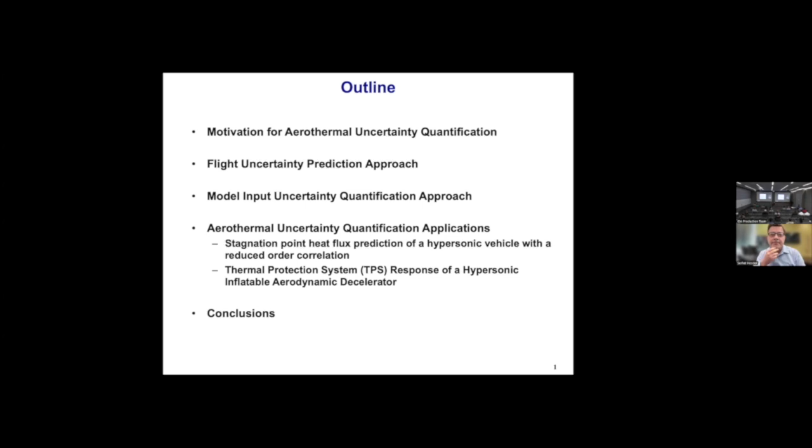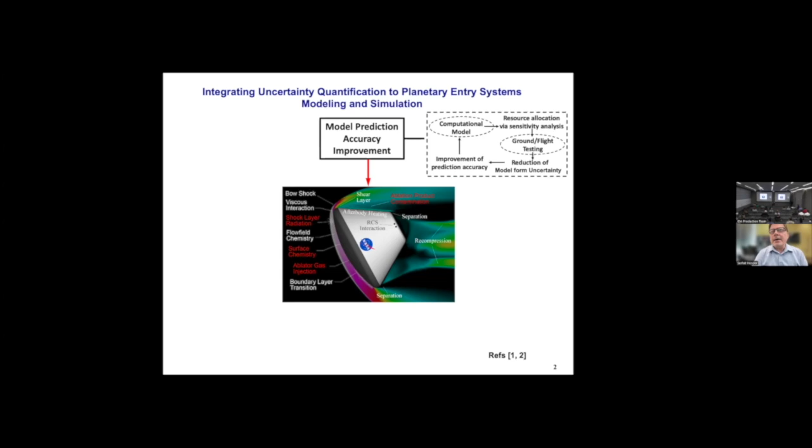And in addition to the inherent uncertainties related to the environment, we also have significant uncertainties in the physical models. So we have a number of reasons to include uncertainty quantification in modeling and simulation. One obvious reason is to improve the prediction accuracy of our models. By using uncertainty quantification, and a byproduct of uncertainty quantification is sensitivity analysis, we can identify significant uncertainty sources in our model. And then we try to plan our ground and flight testing to reduce these errors. In turn, we try to improve our prediction accuracy.

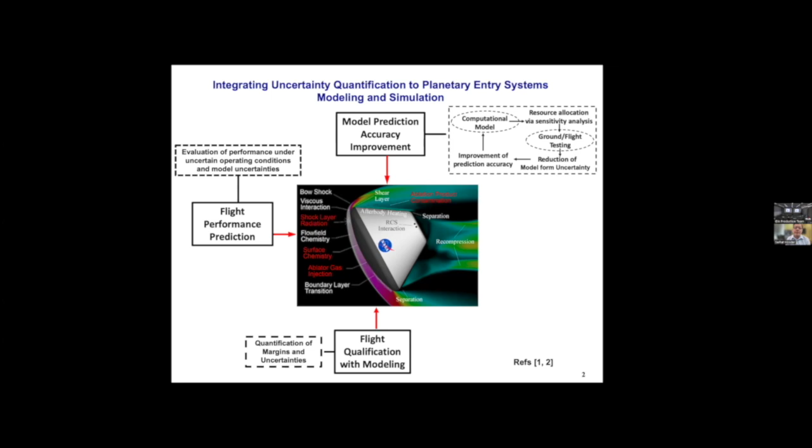The other motivation to include uncertainty quantification is to evaluate the flight performance under uncertain operating conditions and model uncertainties. We can also utilize modeling with uncertainty quantification in the flight qualification of entry systems. We can calculate the uncertainties and the margins, and then using the quantification of margins and uncertainties methodology, we can try to certify our systems. And finally, we can integrate uncertainty quantification into the design of the vehicle to increase the robustness and the survivability. With this, we are reducing the impact of the uncertainties on the vehicle performance and the reliability.

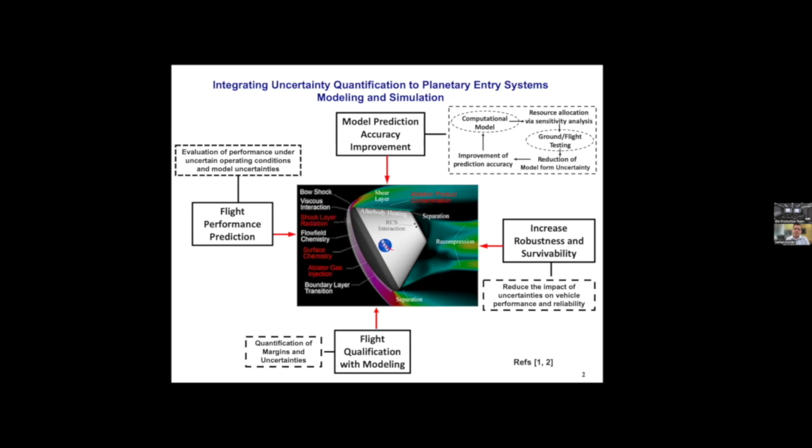So here, I would like to give a brief description of our approach for flight uncertainty prediction with the computational models that we use. Here you see the computational model. It's a CFD model. We simulate the hypersonic environment of a hypersonic inflatable aerodynamic decelerator. I included it as an example. And then in our approach, we also utilize available ground test data and also the flight test data, because our objective is to get the total uncertainty in the predictions to be able to predict the uncertainties in the actual flight. So I'm going to start with the uncertainties associated with the computational model.

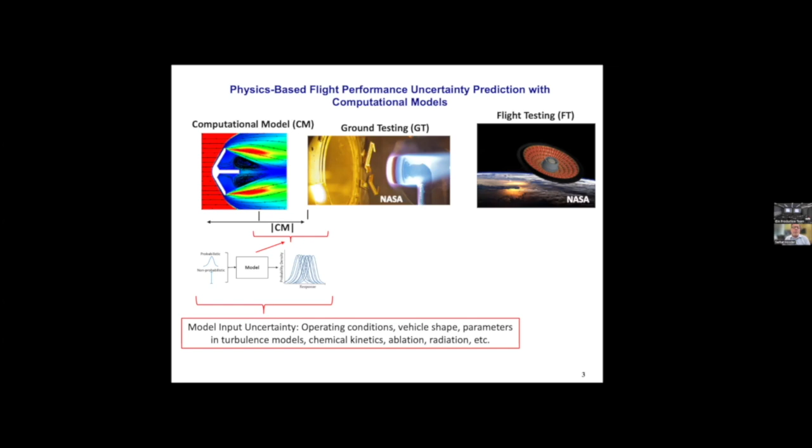We have what we call model input uncertainties, which could be, as you see, probabilistic, or they can be non-probabilistic, epistemic uncertain variables. Any uncertainty for which we don't have enough data, we can also treat as epistemic. And in our approach, for non-probabilistic or epistemic uncertainties, we typically use an interval approach. So we have a mixed uncertainty set, and we propagate this through our model, and that's what I'm going to be focusing on for the rest of this talk. And then this gives us the model input uncertainty for our response quantity of interest, which could be surface pressure, shear, heat flux, or the recession rate due to ablation.

And just to give you some idea, these uncertainties may include sources coming from operating conditions, the uncertainty in the vehicle shape change, the modeling parameters in chemical kinetics, turbulence models, ablation, and radiation. Since we are solving our problem numerically, we also need to include the uncertainty coming from the numerics, such as the discretization error or iterative convergence error.

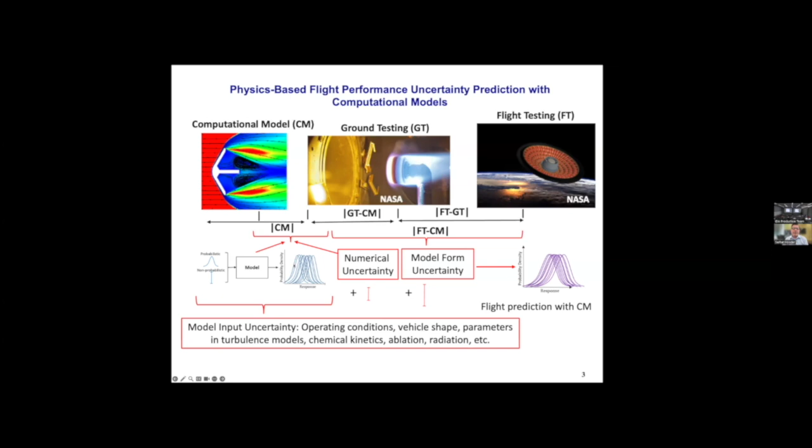And then we have to compare the model input uncertainty appended with the numerical uncertainty to the actual reality. We will be comparing our results to the experimental data or the flight test data. The way we compare our simulations to this experimental data is done through a validation metric, which gives us the model form uncertainty. So overall, when we add all these uncertainties, we have the total flight prediction uncertainty with our computational model. So next, I am going to be focusing on the model input uncertainty quantification.

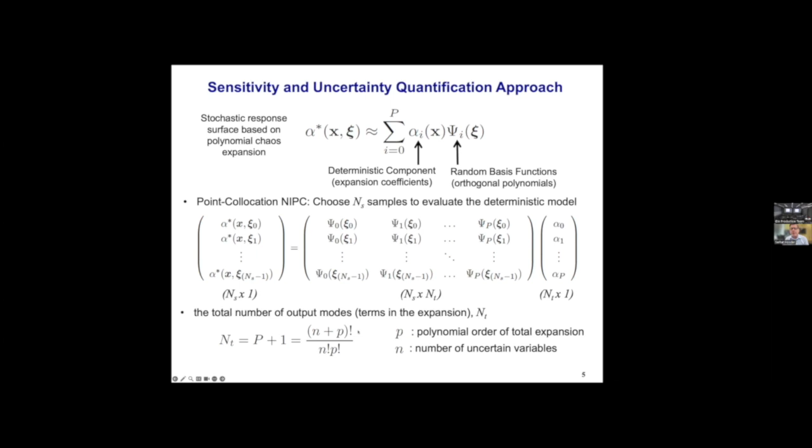Now, there are different ways of obtaining these coefficients, which are the unknowns in our expansion. For our hypersonic entry problems, we've been mostly using this point collocation NIPC approach, where we produce a number of samples and evaluate this model at those sample locations, which gives us this linear set. And this is the number of samples we use. Here, NT is the total number of output modes, which is going to be a function of the number of uncertain variables and the polynomial order of the total expansion.

Now, depending on the number of samples, we can have different approaches to solve this linear set. When our number of samples is equal to NT, we have the required number to obtain a solution with the determined system. We can always take more samples than required, and then we have an overdetermined system. We can define an oversampling ratio, and we had problems where we used an oversampling ratio of 2, which worked fine. In this case, we obtain our solution through a least squares approach.

But for these two cases, even though we use a polynomial chaos approach, when we have a large number of uncertain variables, again, the required number of simulations can be very high. So in order to address this problem, we've been taking fewer samples than the minimum required, which gives us an underdetermined system for that linear set. And this is actually the basis of our sparse sampling approach. It is going to be the most efficient approach in terms of the computational cost.

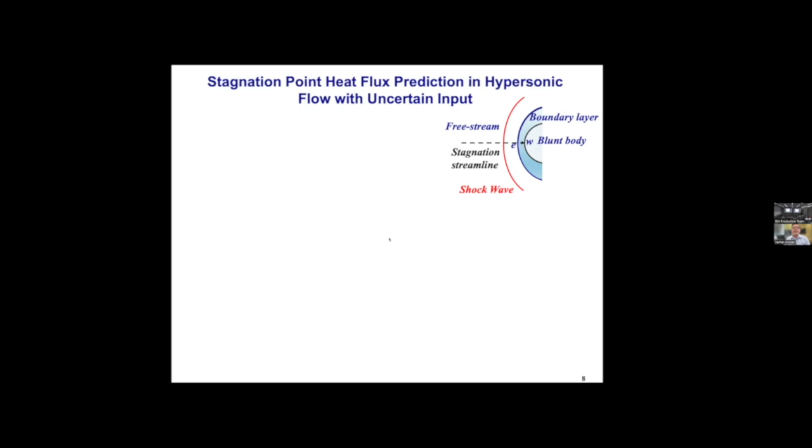Now, I'm going to present our first application problem. This is a model problem, a validation problem to predict the stagnation point heat flux on a blunt entry body. And this is a correlation, so it is cheap to evaluate, and we can do Monte Carlo with this model so that we can compare our approach to the Monte Carlo results. Of course, I'm not going to go in detail over this. This is our mathematical model.

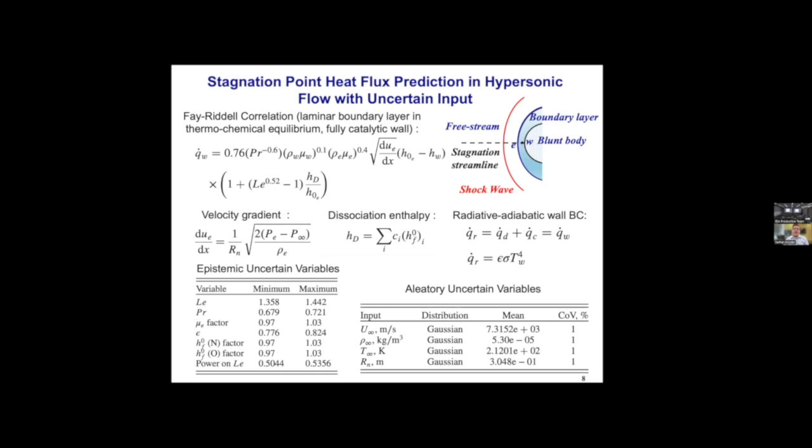So for this case, we considered 11 uncertain variables. 7 of them are epistemic uncertain variables, as you see, and then we have 4 aleatory or inherent uncertain variables. And then with 11 uncertain variables, if you use a second degree polynomial expansion, then the minimum number required is going to be 78.

We solved this problem with the sparse sampling approach using different samples, increasing it iteratively. And then we compared our results to a Monte Carlo simulation with 400,000 samples, and then an NIPC expansion with an oversampling ratio of 2, which required 156 samples.

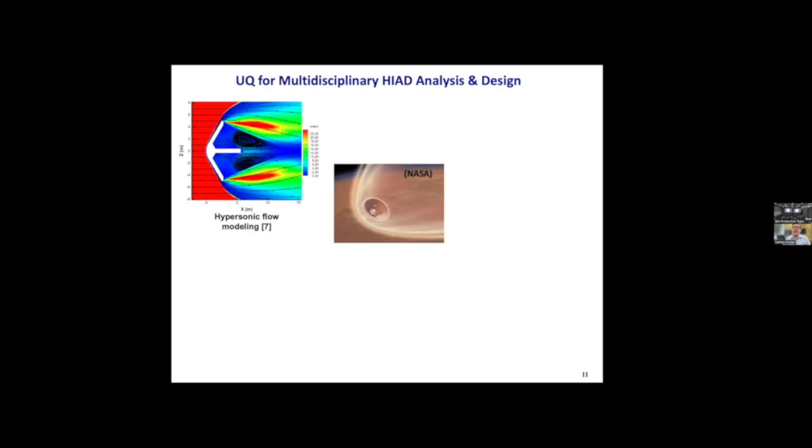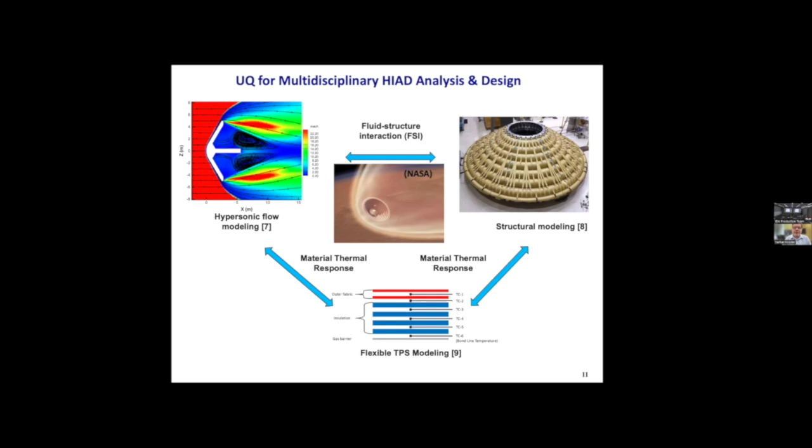So we worked on this as part of a NASA project, and it's a multidisciplinary problem. Therefore, even though our eventual goal is to predict the uncertainty in the thermal response of the flexible TPS, we need to still consider the uncertainties in the hypersonic flow field modeling because it affects the thermal response. And also we had to consider the uncertainty coming from the structural modeling. And I use those in the prediction of the uncertainty in the flexible TPS modeling, which I will describe next.

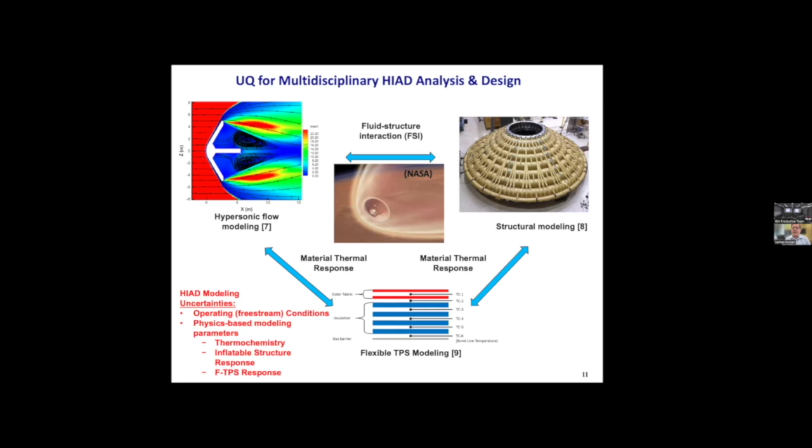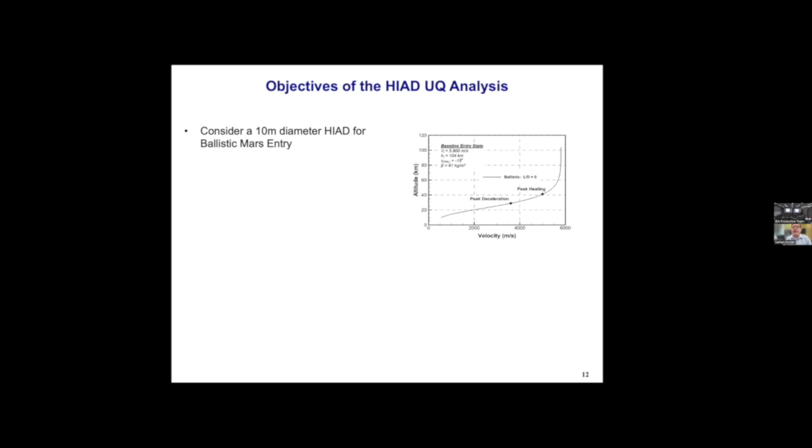And we consider uncertainties in the operating conditions and also various uncertainties in the physical models related to the flow field, the TPS, and the structural modeling. So for this problem, we are considering a 10-meter diameter HIAD for a nominal ballistic Mars entry. And then first, we would like to identify significant uncertainty sources in the flow field, which affects the aerodynamic heating, shear, and pressure, and then use them in the uncertainty quantification of the flexible thermal protection system response.

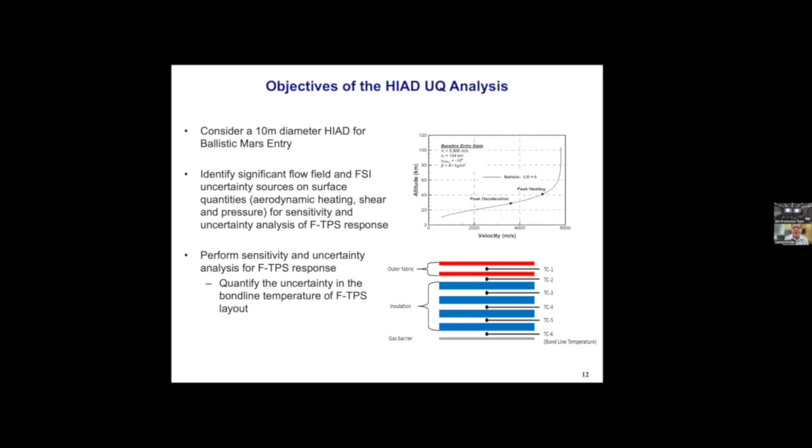And here you see a simplified layout of the flexible TPS. It is made up of different layers. You have the outer fabric layer; it's a silicon carbide-based fabric. Then you have some insulation layers. And then you have this final layer between the gas barrier at the TC6 location. And that is the location that we are interested in, quantifying the uncertainty on the temperature at that location, which is the bondline temperature.

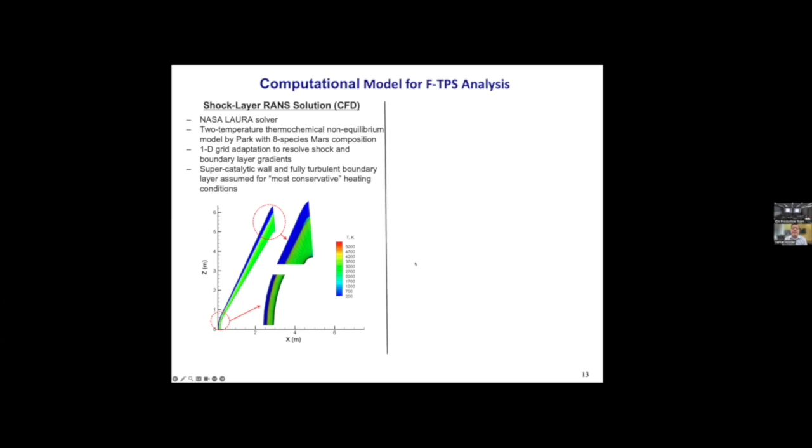So here, quickly, we are using a high-fidelity CFD code from NASA Langley, LAURA, modeling the flow field. And then also we have a thermal response model coupled to the CFD solution. And these simulations are also expensive. That's why we are using the sparse sampling approach.

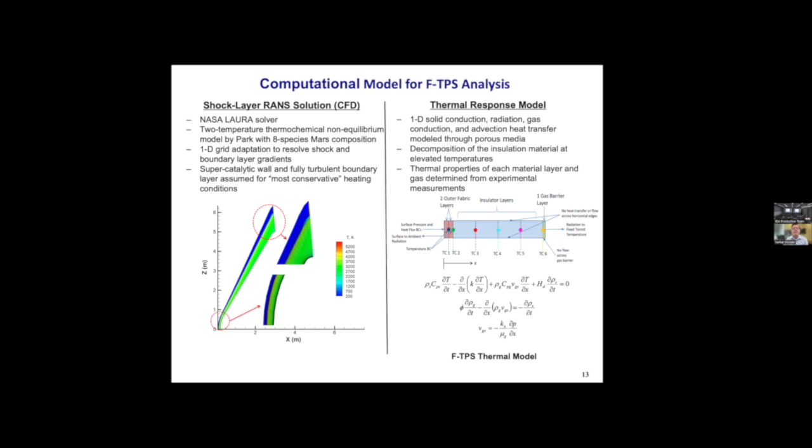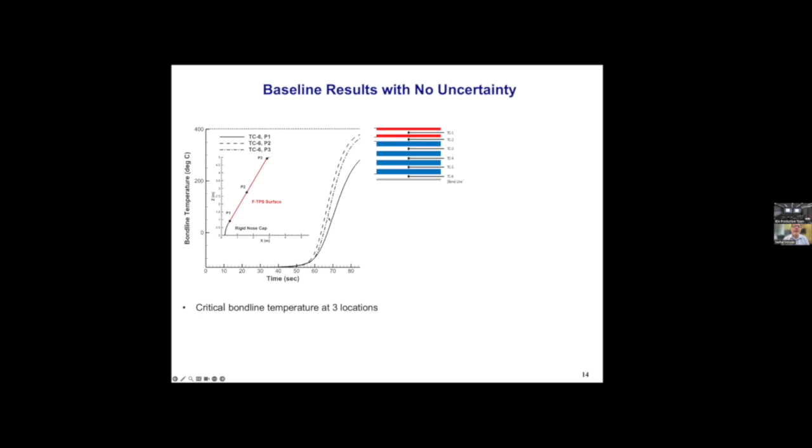So here, just briefly, I show the baseline results with no uncertainty. So if you look at these 3 points over the flank region of the HIAD, you'll see that when we solve the deterministic problem, you can get the history of the temperature at this TC6 location, the bondline temperature, as a function of time. And then here, if we just focus on point 2, we can also look at the temperature history at different in-depth locations at that point, TC1 to TC6.

And one thing to see here is we do not want the temperature to exceed 400 degrees Celsius at this TC6 location, the bondline temperature. And at 70 seconds, the HIAD separation occurs.

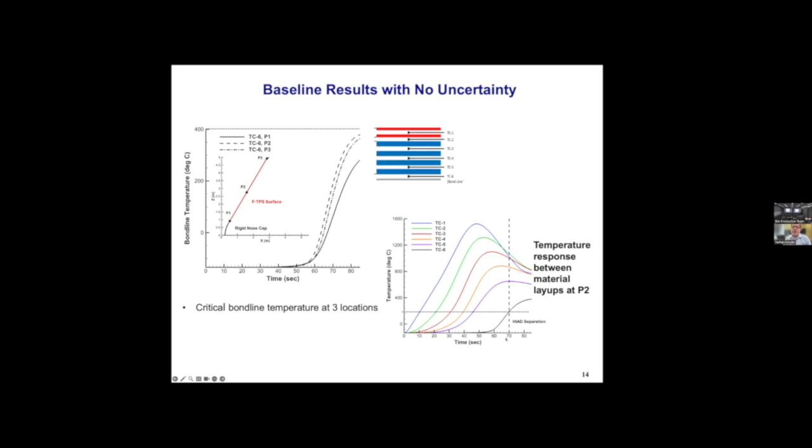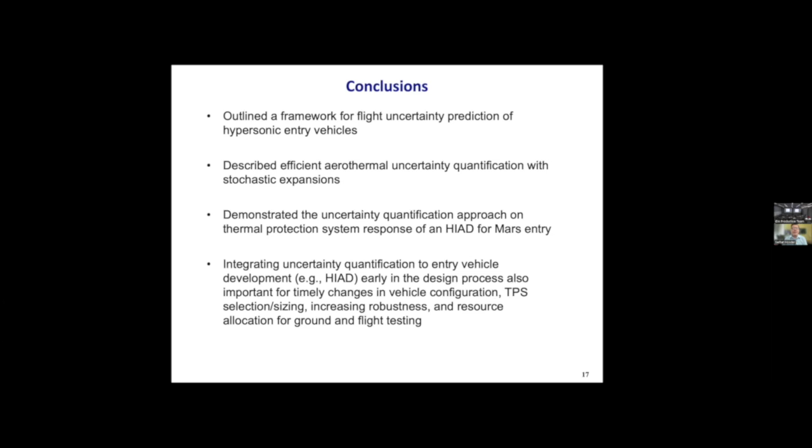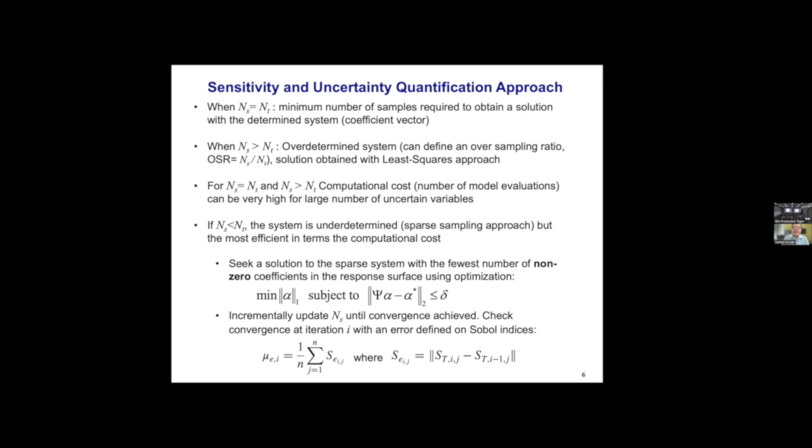I think it's the fewest number of non-zero coefficients. So we are trying to increase the number of coefficients which are equal to 0. Oh, okay. I misheard. Thank you. Yeah, here it's non-zero. So again, each coefficient you can think about as, if the coefficient is large, you will have a larger contribution to the overall uncertainty. So it's almost like a sensitivity analysis. So if I have very small values, then I try to force them to 0 to retain only the important terms in my expansion.